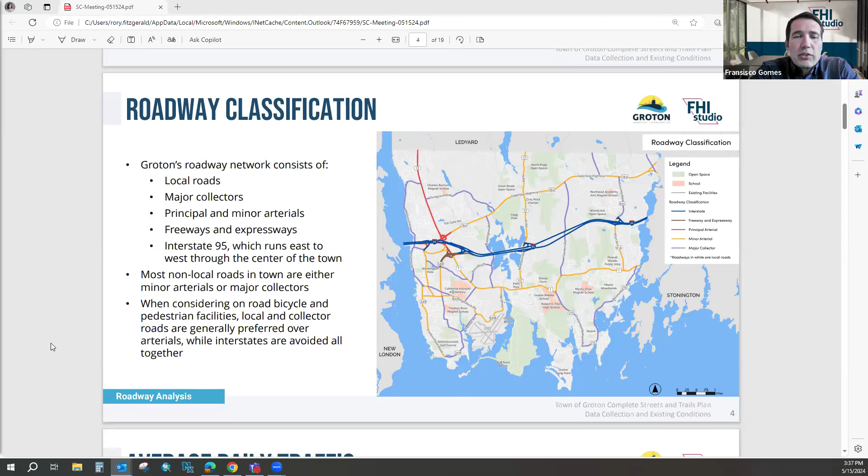But we also took a look at, if we go to the next slide, traffic that you have on those roadways. Traffic can be a huge factor in bicycle facility planning, and to a lesser extent in pedestrian facility planning. But it's very often one of the metrics we look at when we consider the feasibility or suitability of a corridor to accommodate bicycles, and potentially what type of facility would be required to comfortably and safely accommodate bicyclists. So what we see is that you have a range of traffic volumes in town.

Fortunately, while you do have some state roadways that carry relatively high traffic volumes, up above 15,000 vehicles per day, which is a lot of cars, you don't have very many very high volume roadways. Here the darker, red colors are very high volume, 20,000 or more vehicles a day. That's really just Route 12 where it meets I-95. In other areas, our volumes are more manageable from the perspective of considering the accommodation of bikes on those roads or adjacent to those roads.

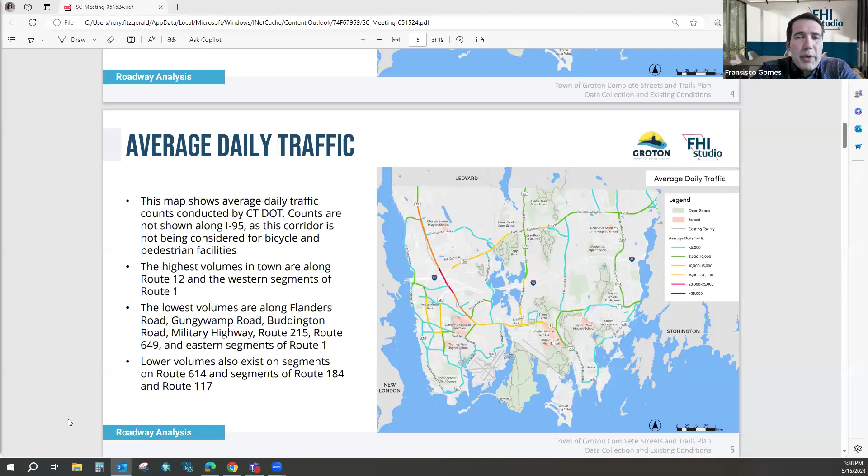So that's all good news, and we have that all mapped now. If we go to the next slide, we do have some traffic speed data, and speed is another important factor when planning bicycle facilities and both the safety and comfort of those facilities. What we see here is the speeds are on the higher end. So while the traffic volume is relatively moderate on many corridors, the speeds are on the higher end. Sometimes there's a direct correlation between the two: where you have a lower volume roadway, the speeds are higher because there's less traffic to constrict or restrict speeds.

So you have many roads that are above the 85th percentile speed. Real quick, a basic lesson on 85th percentile speed: that's the speed at which 85% of traffic is traveling at or below.

It's intended to eliminate any particular outliers of people speeding or scofflaws, and it's intended to paint the picture of the average or most typical traffic flow on a corridor. So your 85th percentile speeds are at or above 40 miles per hour on many corridors. As a cyclist sharing a road with traffic at that speed, it's not a very comfortable experience, and it reduces safety. So in addition to traffic volume and the characteristics of the roadway, we need to consider traffic speed when planning complete streets, bicycle and pedestrian facilities.

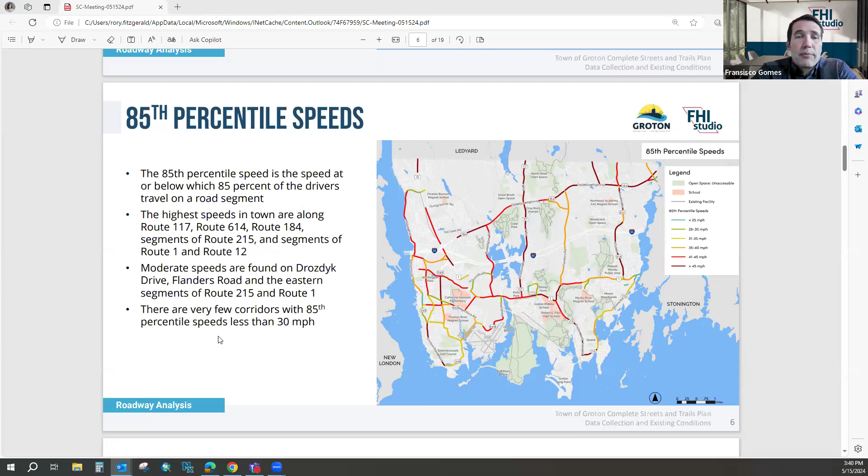Next slide. We took a look at the crash safety data. Of course, wherever you have traffic volume and intersections, you're going to have crashes. So what we see here is where the crashes are occurring. These, what we have on the map, are hot spots of all crashes. The heat map - red dots and yellow indicate higher frequency, green lower frequency crashes.

What we see here is, of course, I-95, but let's subtract that out of the mix because that's not part of our study area or scope. But your local roadways, your state highways, whether it's Route 1 or some of the other state roadways, that's where your crashes are occurring. They're crashing mostly at intersections. So it's a fairly predictable pattern.

At this stage in the planning, it doesn't discourage us from considering any of these corridors for bicycle facilities. In fact, in many cases, you can make an argument that where you have a corridor with a higher degree of crashes, it's really an argument for a separated bicycle facility or some sort of pathway to accommodate bike traffic. Particularly, it's an argument for getting pedestrians off the roadway, away from some of those traffic conflicts.

This is something we'll continue to look at, and we'll look at closer as we start to consider recommended facilities and various intersection treatments to accommodate those facilities. We'll be taking a much closer look at what types of crashes are occurring so that we can improve safety along with expanding mobility for all users.

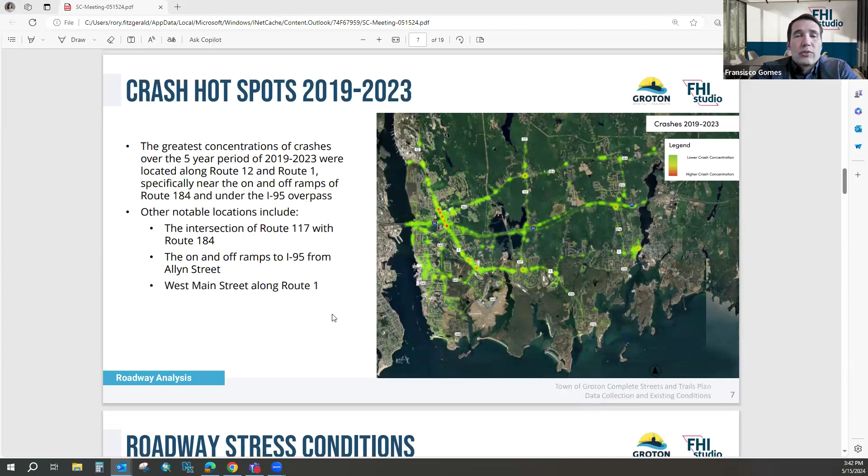If we go to the next map, it's a composite map that we made of those various conditions, whether it's traffic volume, speed, or crashes. So what we see here is when you combine those different factors, it adds to the level of stress on any particular corridor.

The more volume you have, the higher the speed, the greater the incidence of crashes, the higher stress environment that will be. At which point, if we want to accommodate pedestrians and bicyclists, we want to make sure that in addition to being safe, which is the number one priority, that they are also comfortable, because if they're not comfortable, they won't feel safe. And if they're not comfortable, they'll be less likely to bike or walk or use the facilities that are built for them. So comfort and level of stress is an important consideration, and this map just guides us in that effort.

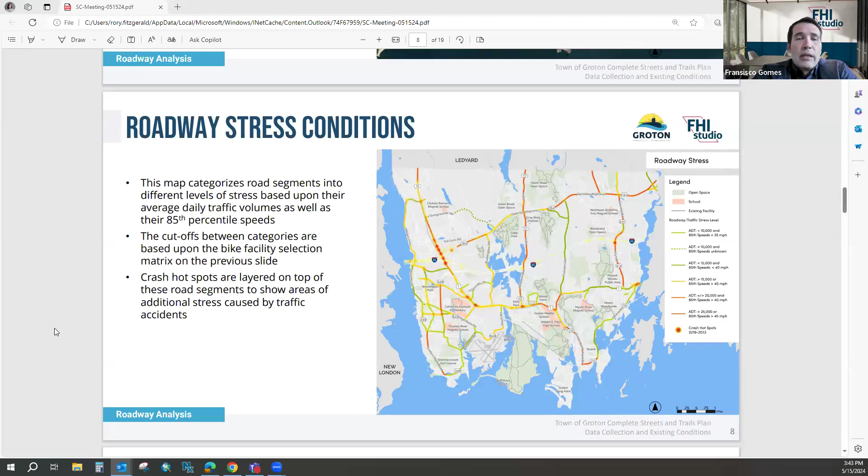Now if we go on to the next slide, this just expands upon that work with other factors. Here we actually map out the stress - the prior slide was the factors that contribute to the stress, this is mapping it out. So the green would be lower stress corridors, the red higher stress, et cetera.

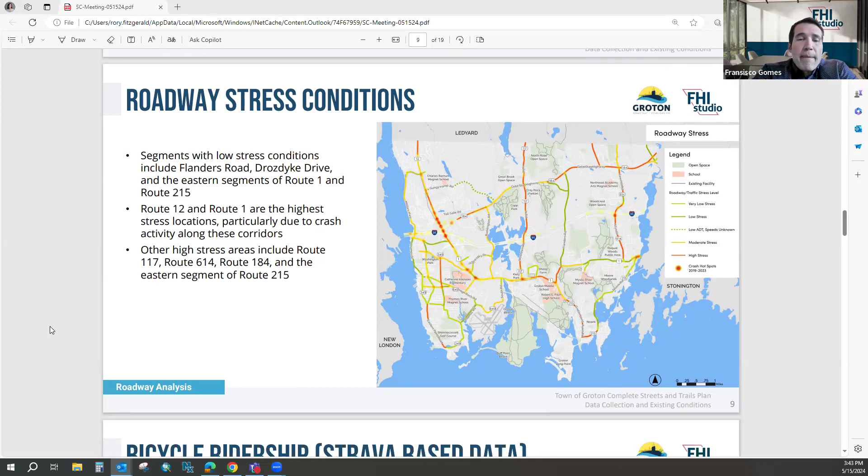On to the next slide, we've also taken a look at where people are riding bicycles - this is just for biking, we could pull one down for running as well. This is Strava-based data. Strava is an app that a lot of people have for their phones or watches, and it requires the user to basically log their trip, run, bike, or whatever it may be and record it. So it's driven by recreation - it's a recreation-based app for recording your workouts.

Fortunately, Strava has that one side of their business consumer focused with the app. The other side of it is actually selling the data, which I think, as we understand, most of these tech companies make a living by selling our data. We have a subscription to that data, so we pulled down the Strava bicycle data for Groton.

And we have some maps that show exactly where people are recreationally riding their bikes and logging those trips. The heavier, the darker the line weight, the more trips there are. We can zoom in to get more detail. We have a good idea of where people are recreationally riding, and it's on many major roads, even ones you'd expect people wouldn't want to bicycle on. They're riding long trips, or even short trips in some cases.

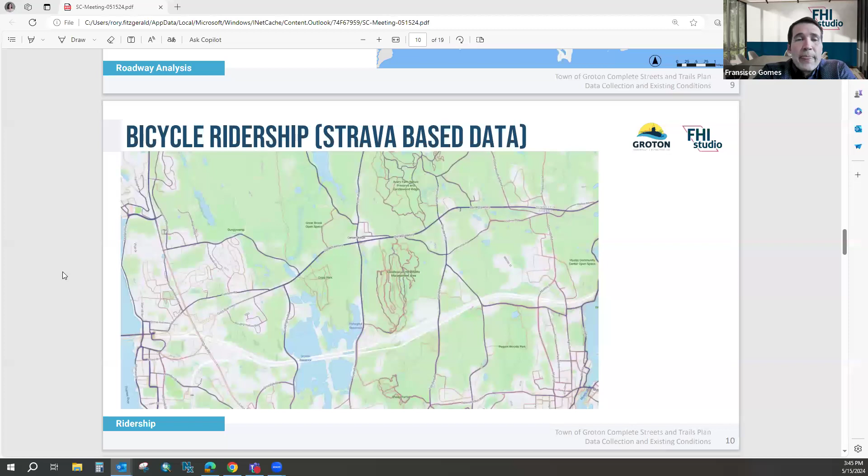So this is a piece of information that will help us quite a bit in our work. We did reach out to SCCOG. So that's the northern half of Groton, and here's the southern. Hey Fransisco, this is Brian, I have a question about the Strava data.

Yeah, absolutely. There is an option for a Strava user to characterize their ride as a commute. Do you have access to that level of data? Not on the surface — I'm not the one who pulls this data down, and I think that may require a really premium level of subscription. I think we just have the entry level subscription, so I'm happy to look into whether we can get some metadata for these trips. Right now, we definitely know where the routes are and what volume of traffic there is on those routes. As to whether we can get metadata on that, I'd have to look into it.

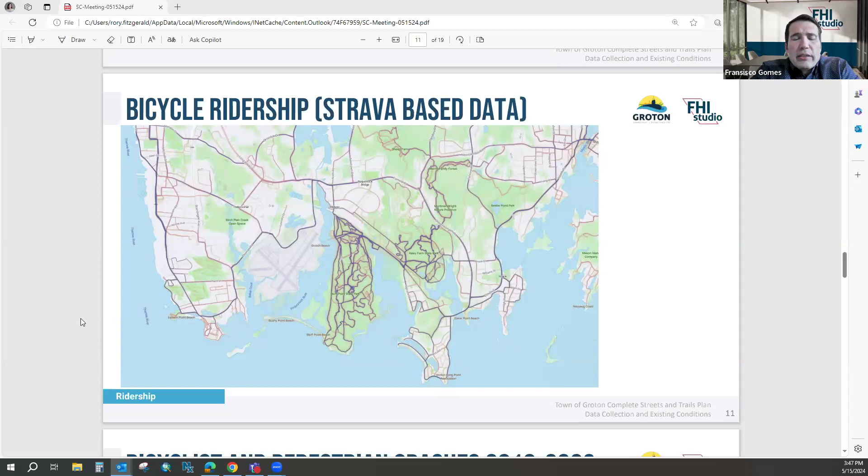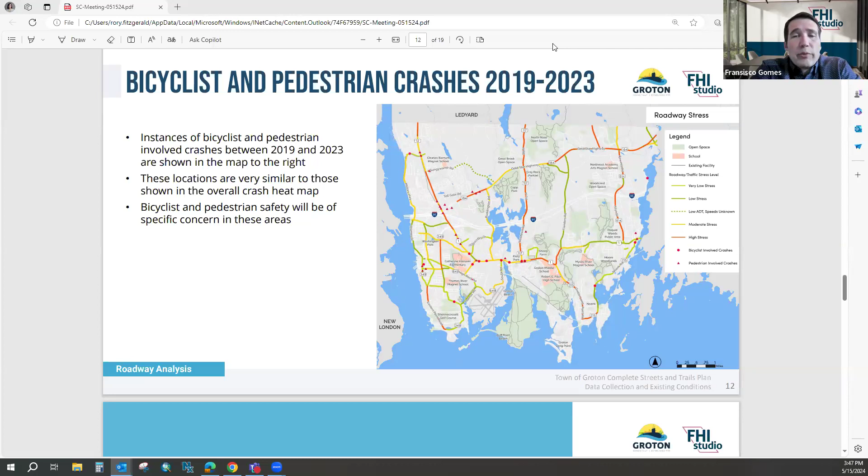All right, so I talked earlier about traffic safety and crashes. If we go to the next slide — fortunately this is an excellent data set we get from the Connecticut Crash Data Repository, which has a tremendous amount of metadata. You can really understand what's going on with the crashes, what the contributing factors are, whether it was bike-ped related, time of day — it's an incredible resource of information. So we pulled the bicycle and pedestrian crashes over a 5-year period, as recent as the end of 2023.

So we have a bunch of pinpoint locations. We see a consistent amount of crash activity primarily along Route 1, and some other locations scattered, but there's almost a pattern, which can be difficult to establish sometimes with bike and pedestrian crashes. Fortunately there aren't many of them, and they tend to be one-off occurrences. We don't often see patterns, but here there's definitely a pattern along Route 1 in those triangles and circles shown — circles are bikes and triangles are pedestrian-related crashes. So we'll want to take a much closer look at that as we consider facilities for Route 1.

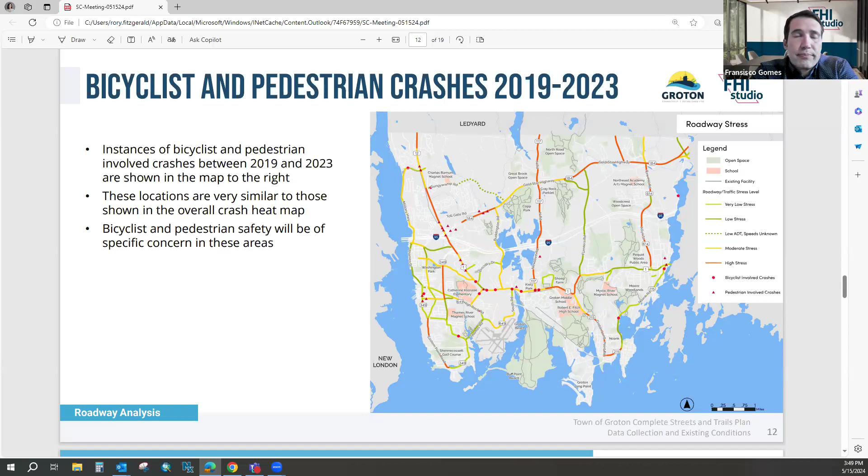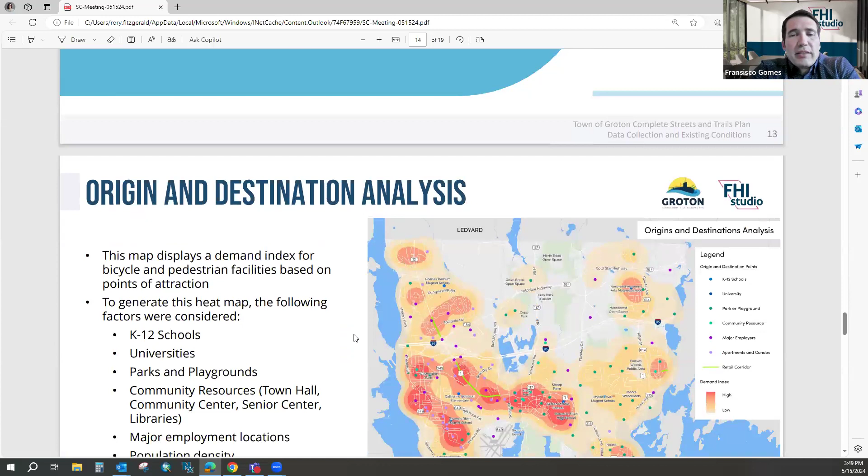Okay, all right. We've also done an origins and destinations analysis. This analysis is intended to show us where we expect most trips to be originating from or arriving at — both bicycle and pedestrian trips. This is analysis we conduct ourselves, a GIS tabletop analysis. We first map locations we'd expect to generate those trips or be a destination for people arriving on bike or foot — starting with K through 12 schools, universities, parks and playgrounds, community centers like libraries, town halls, senior centers, major employment locations, areas of high population density, and retail corridors.

So we map all of that. We assign a weight to each one of those pinpoints on the map, and then they exert an influence, and there's an algorithm or a script we run this through in GIS, and it produces a heat map.

So what we see is that we expect most of that activity to be generated, those trips to arrive at or be generated from locations along Route 1, mostly south of I-95, on the western corner of town, to a lesser extent on the Mystic side of town, and much lower densities of trips generated north of I-95.

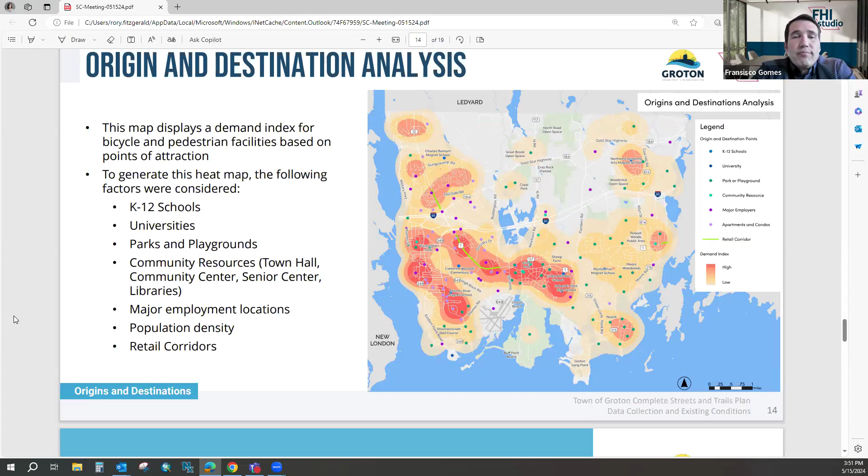Fransisco, we've got a question. Yes, sir. Patrice has a question for you. Hi, it's Granatowski. A question about the map that's in front of us right now.

Is this based on historical data or is this speculative? I would call it speculative. So these aren't actual trips. This is modeling that we've done, and it's pinpointing all of these locations that we expect would generate a bike or pedestrian trip, or be more likely to. And then we model what we expect would be the highest density of trips.

So it's a model, and it's somewhat predictive, except this is true right now in this moment. We're not painting the picture of a future scenario. These are the locations where we think you have the highest activity of bike and pedestrian trips or demand. It's not always associated with actual activity because there may not be any facilities to support bicycle and pedestrian trips in these areas. But we think this is the area of highest demand, and that could be a latent demand if there are no facilities there right now.

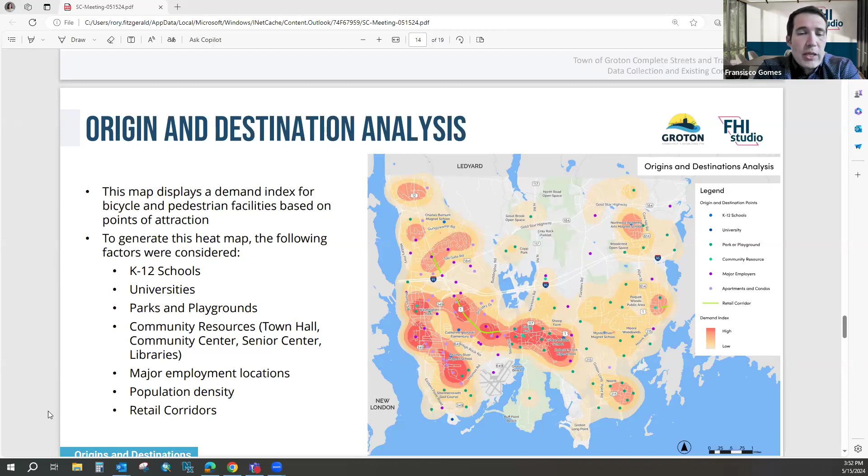Okay. All right, so our next slide.

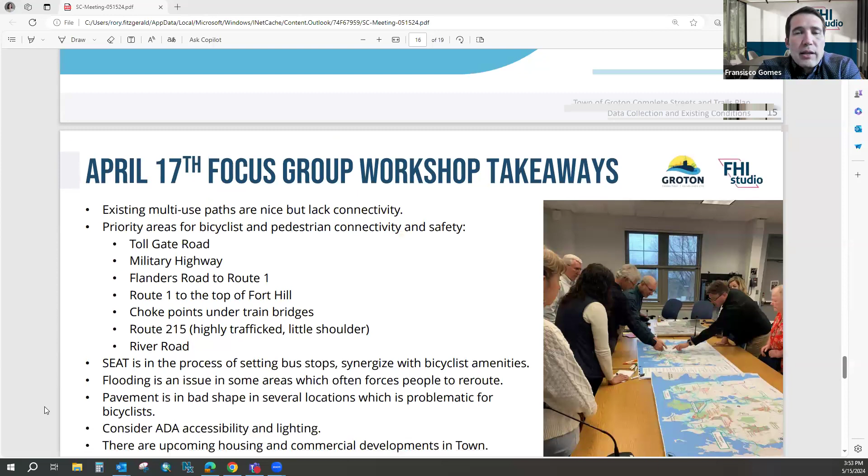I think most of you, if not many of you, were in attendance at our focus group workshop last month, so I won't spend too much time on this, other than the fact that there were some clear takeaways from that. We've got a summary report that goes into much more detail here.

Some of the key takeaways: we definitely identified key corridors that should be a priority for bicycle and pedestrian connectivity. We understand that doing a better job connecting to and integrating with transit service is really important, and that there are some routes that due to flooding often force people to reroute. So we need to think about flood hazard areas as we plan facilities, and have some redundancies likely built in to accommodate flooding, whether storm related or seasonal.

We know that pavement quality is an issue, and it's an issue in every community we work in. Particularly for bicyclists, the edge of the roadway sometimes can be the biggest challenge. ADA accessibility is incredibly important, and lighting is also an important issue for pedestrians.

There's upcoming housing and commercial development that should be accommodated or connected to facilities. And then there's some active work on facilities such as the Poquonnock River Boardwalk, and we need to make sure that we're connecting to those projects.

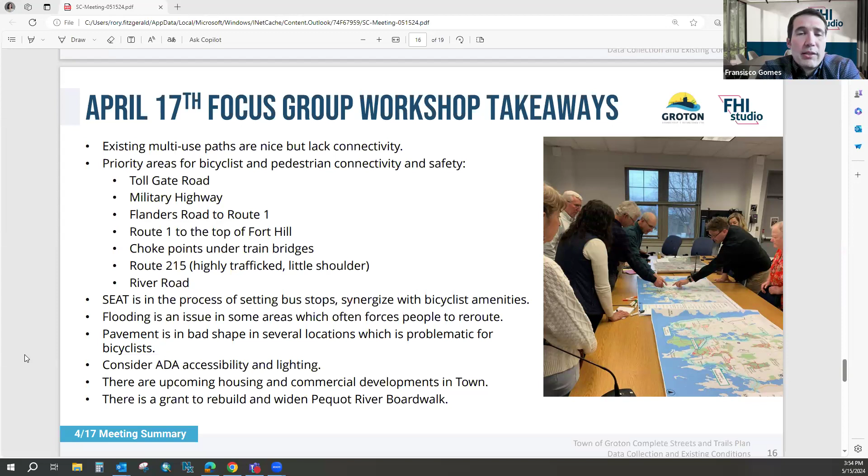Okay, Francisco, there's a typo. Yes. Your last bullet item, yep, that is actually the Poquonnock River. Oh, I'm sorry, you'll have to look that one up for spelling. I'm not going to try and spell it. Yeah, no, I got it. We've got a Pequonnock in Windsor, although I think it's spelled differently. Okay, thank you, Brian. All right, next slide.

And then, of course, we did a tabletop mapping exercise. Based upon the work we did with you last month, our existing conditions work from the various multiple plans that have recommended greenway corridors or bike routes, we definitely have a network that we would consider to be a preferred network. So we have a good starting point, the framework of a bike and pedestrian network.

I think our next step is to take a look at this, lay it on top of all the data we collected, and then start to identify corridors that we think have real potential to accommodate facilities, and then figure out what type of facilities those should be.

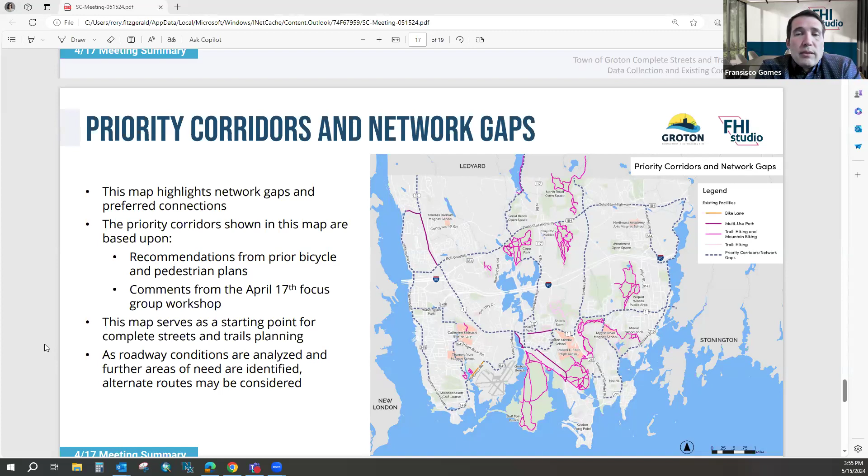As I mentioned, we have an online survey up, and we really need some help getting the word out on this. I know Mark's been pushing this out as best he can, and the rest of the department's been pushing it out on social media, on the website, on message boards. But to date, we've had a little more than 100 responses. We do have this out in a Spanish language survey as well, but we have not yet had participation in it. We have flyers for the Spanish language survey too, so we really need to get people to participate.

We don't have a hard deadline on this. We can keep it open for a while, but as we get into the middle of summer, we start to lose people's attention. So we've got another month or so where I think we could really get people's attention. If we can do whatever's necessary to get the word out and get some real participation, the feedback we receive from the surveys is just another touch point that will help guide us in decision-making and in our planning, so it's really valuable. The binary answers to questions, the yes or no, or checkboxes, are valuable, but the open-ended responses can be really telling. The more people we can hear from, the better.

Great. Thanks, Kalle.

Thank you. My name's Tom Hogan. I'm a senior engineer with Wright Pierce, and I have with me Kalle Maggio, a landscape architect, and Larry Rusiecki, project manager with the firm.

We began talking about some of the project status, but we'll go over it again. Greg mentioned the project area, and I handed out some of the concepts we're going to go through in more detail so we can see. I realize it's hard to see at that small scale. There's a lot going on, but we'll talk about some design considerations, the concept drawings, some options, utilities, and then hopefully have an interactive discussion about what we're showing. And this is us.

If we remember, we engaged with Greg's department at the end of last summer, early fall, then went directly in November or so to a public listening session held at the fire department. We had great discussions about some of the observations over time from people who live, use, or visit the project area. We took a lot of that information and made a record of it.

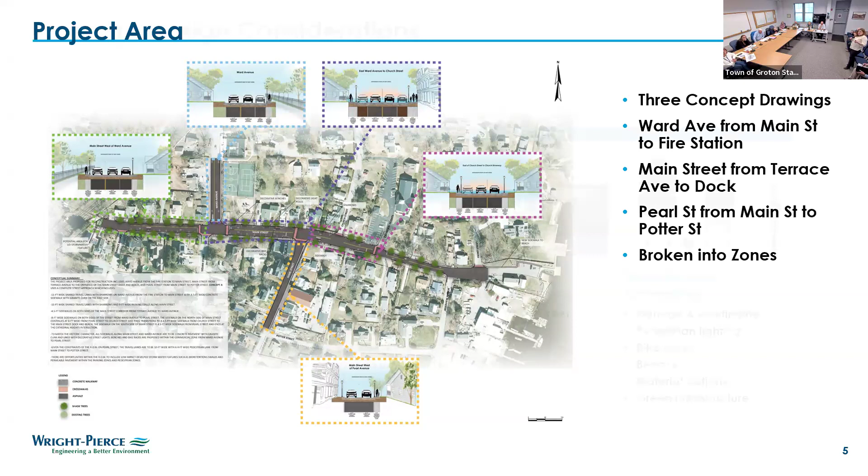It's kind of a working document at this point. We're definitely looking for input, thoughts and ideas. Essentially what we tried to do is look at different ways to improve the intersection by adding additional lighting. We noticed that during the evenings it was relatively dark in the area, especially during the listening session, around 4:30 or 5 o'clock, and it was pretty dark in and around those corridors, hard to navigate especially during winter evenings, and I'd assume even during the summer. We also looked at pedestrian and cyclist connectivity. As of right now, there's very limited pedestrian zones or cyclist zones.

So some of the things that we looked at is trying to incorporate the community feedback. One of the major concerns that the community had was to not make it look anything more than, so to kind of compromise with the complete street strategies and what Noank and the main street there has continued to look like over the history of the road. So that's something we took into consideration.

We also looked into the parking. We noticed that there were a lot of people parking in areas that said no parking. So to consider defining areas where people are able to park with clear signage and pavement markings, and to also add in those sort of off-street signage for parking as well.

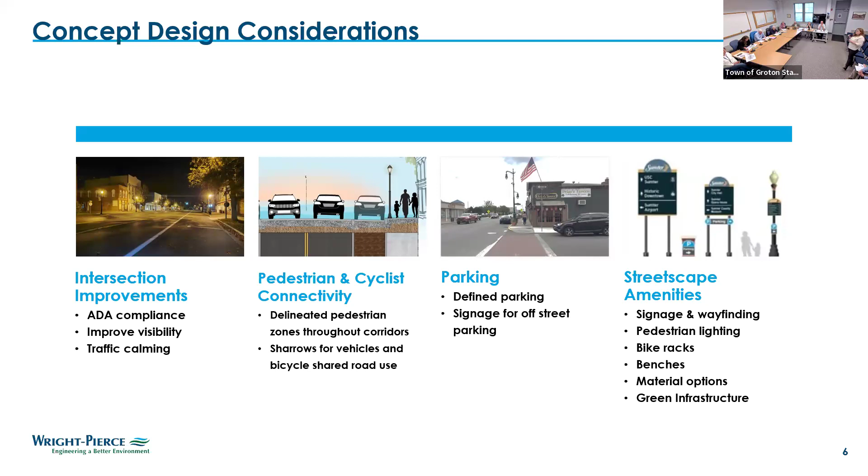So concept A, the main differences between the concepts, it's very hard to see. I know it's at 60 scale when it's at a 24 by 36. So at 11 by 17, it's about 120 scale. So what we tried to do is break them up into section elevations. Again, fully customizable - we can address and edit these as needed to move forward into the public comment phase.

If you guys have any ideas or thoughts or things to add or take away for whatever reason, just let us know. But basically what we ended up doing, we broke these up into zones as mentioned before. So that first zone that you see was that green zone over by Ward, west of Ward Avenue, where we considered that a residential zone, basically Main Street west of Ward Ave.

And we've included 4.5 foot wide curb sidewalks on either side of the street, maintaining 11-foot travel lanes, not just there, but throughout the Main Street corridor, and also Ward Ave as it exists today, even though it's not delineated. Another element that we included was 9-foot wide parking stalls, painted out in the conceptual drawings, but there's different ways to sort of conquer that, whether it be with pavement markings or even considering permeable pavement shoulders to help with stormwater infiltration.

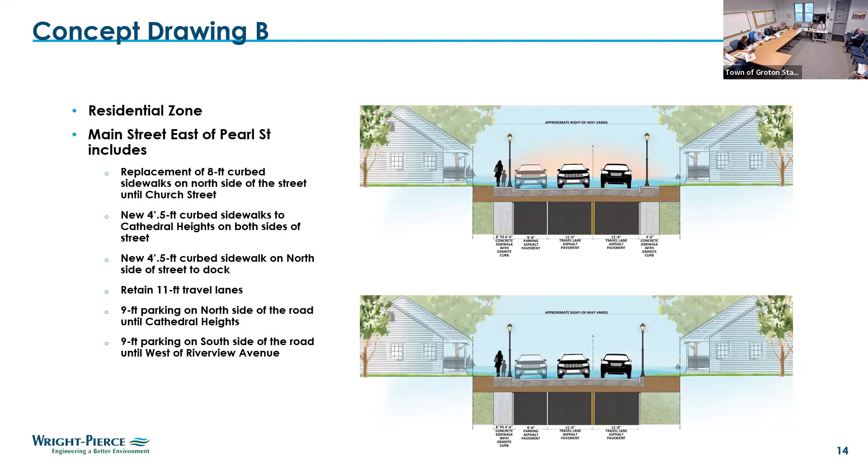Instead of needing to realign the roadway, we decided to instead allow the parking that people are currently doing on the south side, east of Cathedral Heights to west of Riverview. About 3 stalls can be retained there.

Concept C, the thought process here is to have a continuous walkway all the way from the west side of Main Street down to the docks. This does require a roadway realignment. It does encroach into people's lawns a little bit more, and there's going to be some retaining walls required. It's a little bit more of an invasive process, but since it's a full road reconstruction, this would be the time to do it and really look into how exactly this corridor will look as a complete street.

With those bicycle corridors, it seems to us that it still lies within the town right of way. Correct, everything is within the town right of way. It's just that within the town right of way, there's significant changes in topography, some retaining walls with some driveway aprons, so that required us to encroach within the roadway to meet these design criteria.

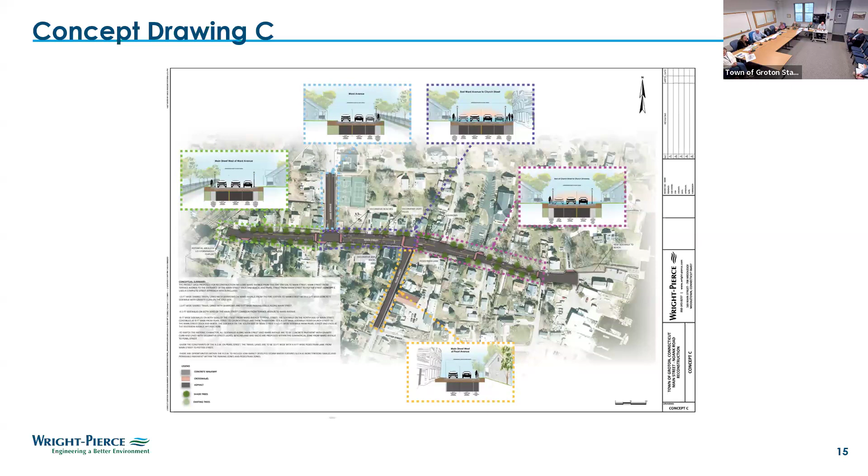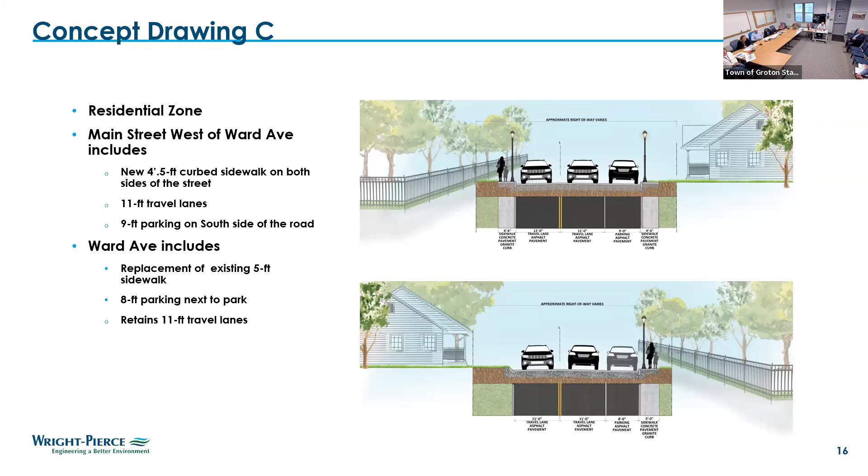Which is where you see us utilize the 4.5-foot wide curb sidewalks for most of the design, rather than the 5-foot. That said, we do know that there is a transition period that would need to take place for ADA compliance, where you would go from 4.5 and widen it to a 5x5 every 200 feet or so. We can accommodate within certain areas and try to mitigate the amount of impact it will have on the overall topography and reduce the amount of retaining walls that would be needed.

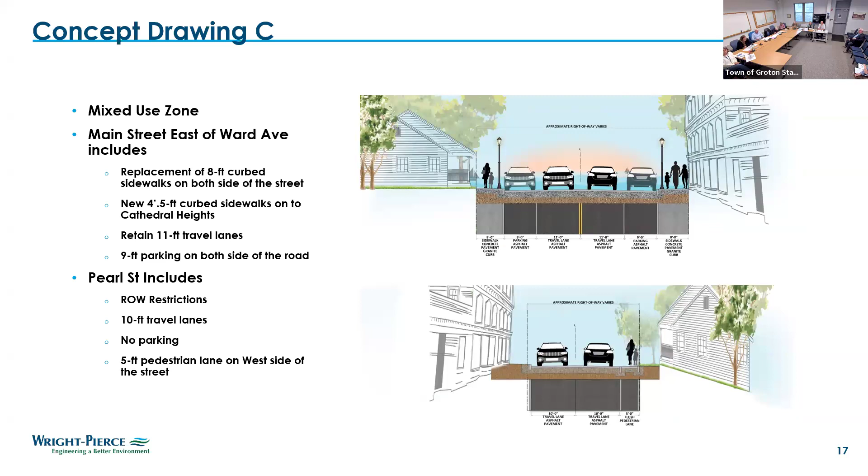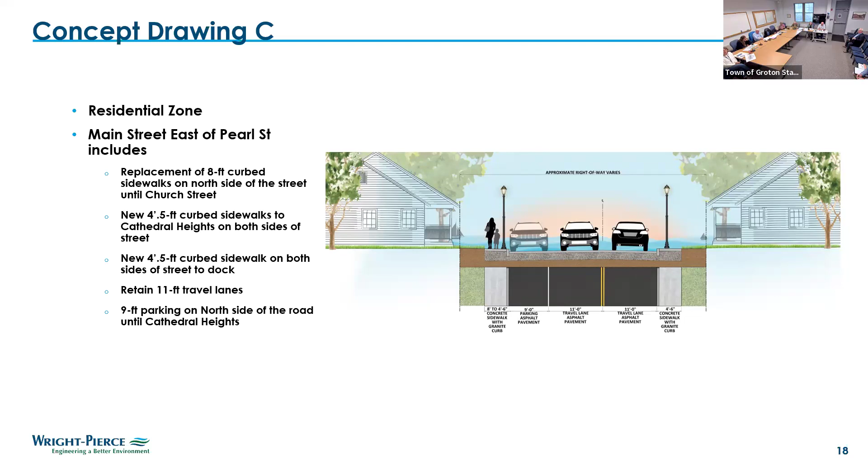So again, very similar to the other concepts. I believe concept B has a very similar layout here for these corridors within the mixed use zone. The difference is that instead of having parking on the south side, we encroached into the roadway to include a sidewalk on that south side, but still kept that continued sidewalk on the north side straight through Main Street.

Streetscape amenities to consider - we would like the town and neighborhood village input on what they would like to see within this corridor, whether they want sidewalk curb decals to add character, or to create different zones and materials that feel more quaint and inviting, thinking about the atmosphere and scale. That's really where those material options come into play. All of the materials we would consider are fully ADA and PROWAG compliant, as long as the design and construction meets those criteria.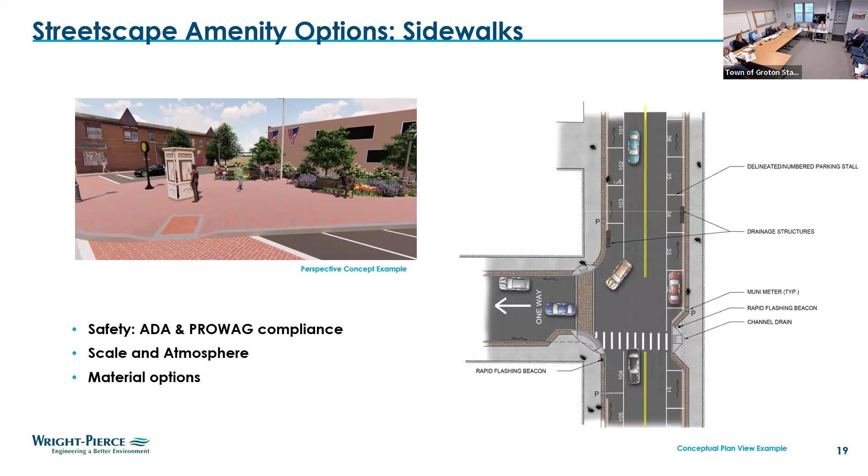Intersections and crosswalks - you'll see we used a bit of a salmon color, but we're not married to that idea, it's just for graphical purposes. So consider the different types of crosswalk materials, whether they want inlays, pavers, traditional paint, or community projects to express the neighborhood's artistic views, if that's something they desire.

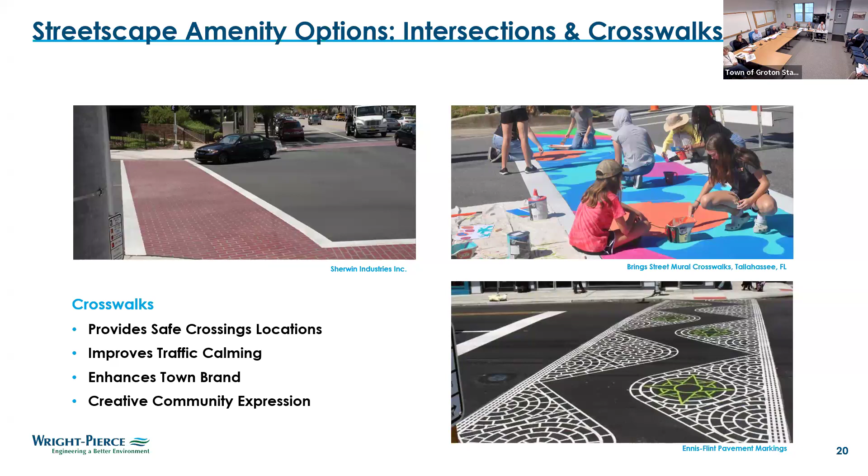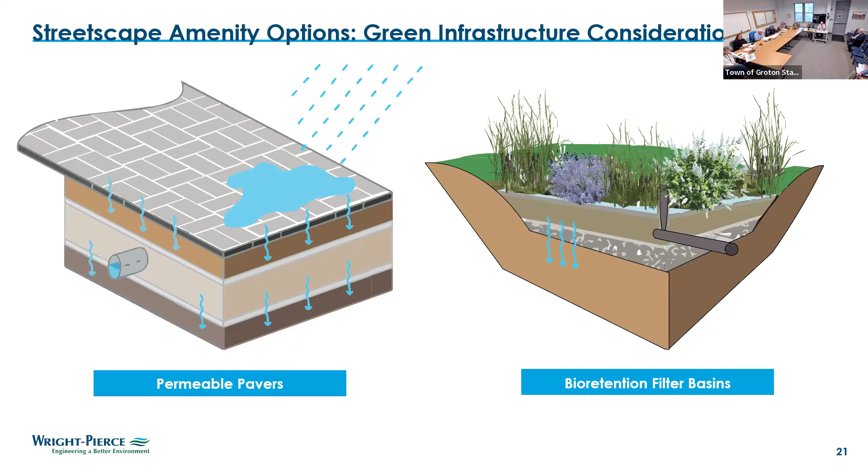Other elements to consider - in a lot of cases we're widening the roadway in some areas, and that's going to impact the overall impervious surface area. That said, we need to look at stormwater and how that's going to be impacted. So we want to consider green infrastructure practices such as permeable pavers, thinking about utilizing those in the parking stalls, and also bioretention filters, specifically at the west end of Main Street, west of Ward Ave. There is an opportunity to utilize that space as a bioretention area for stormwater infiltration.

Again, things we want the neighborhood to consider is coming up with their own sort of brand, and something to think about is how they go about it. One way is to include signage and wayfinding within the corridor. One issue they have, as you can obviously see, is people park in areas they're not supposed to park. So clearly defined spaces for parking would help them understand where parking is available behind the shops and different commercial areas.

Other options to consider - there was support for benches and bike racks within the corridor. And as I mentioned, they were looking to include the trees that were originally removed. I believe it was Dutch elm disease that wiped out the trees lining the roadway on Main Street, and bringing back something that could recreate that historical look is what the community was looking for.

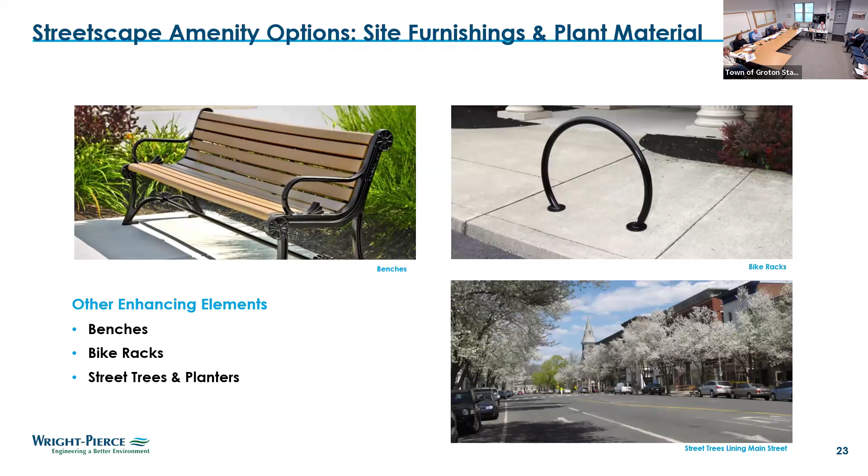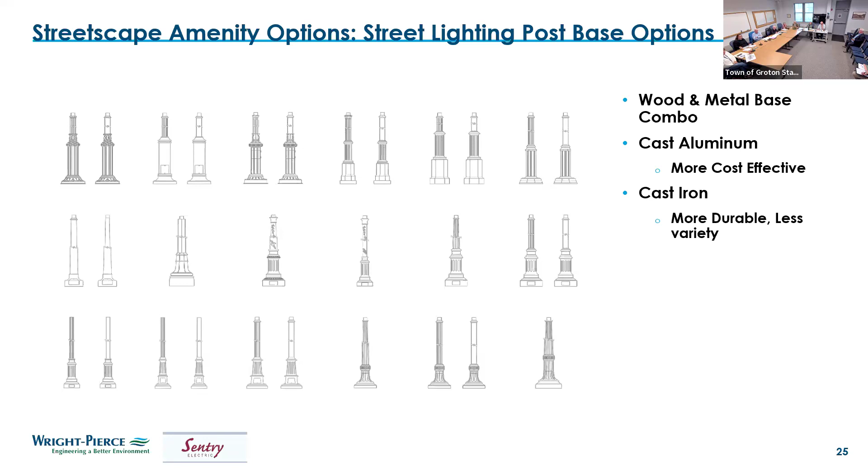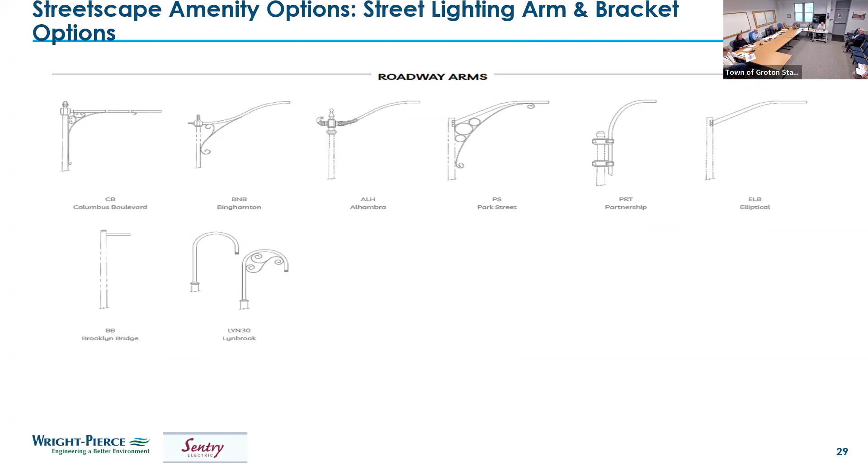There was very high support for street lighting, albeit there are some options - I won't go into full details, but there are a lot of options available, and that can really help the neighborhood create a sense of identity. That said, picking out their pole base and standardizing it, or if the town would like to utilize their own and use that throughout the corridor, that's also an option. There are many different types of light fixtures available within the catalogs, or if the town has their own to utilize within the corridor, that's something that can be discussed during community input. The type of arm is essentially where you mount the light fixtures.

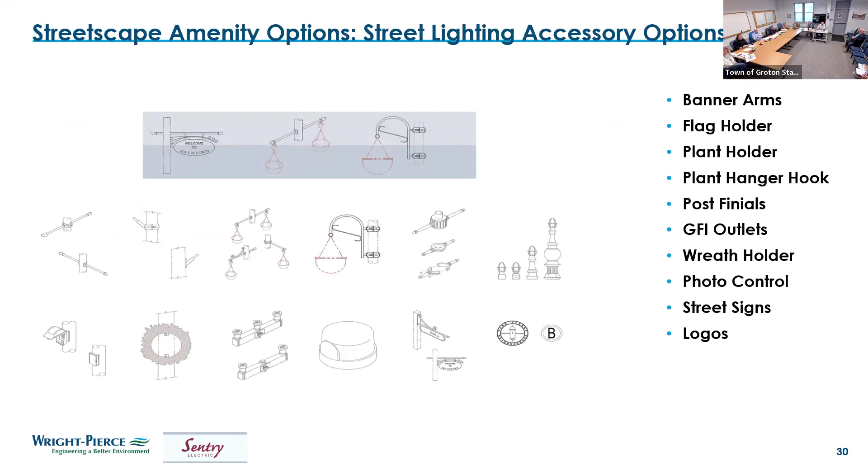The different accessories, whether for flagpoles, baskets, or wreaths, for celebrations and things of that nature. And the last thing we wanted them to consider, with significant feedback on this, was taking the above ground utilities and trying to bring them underground to bring back that historic view shed that ran throughout the Main Street area. It's something we've looked into, but I don't want to speak to it too much because I only understand it at the surface level, so I'll give it to Tom or Larry to discuss.

We recognize the comment and we'll continue to discuss it. That's kind of where we are with it. There are a lot of complications with it. I like the idea, but Greg and I are going to continue to investigate that.

The only other item, and thank you Callie, it was a great presentation. You talked quickly about stormwater and green infrastructure, LID. We talked about biofiltration. We don't have an official mechanism or BMP cited right now. The idea is to have this on generally a small scale so that we can find the appropriate location if it exists, and take advantage of that for responsible stormwater management.

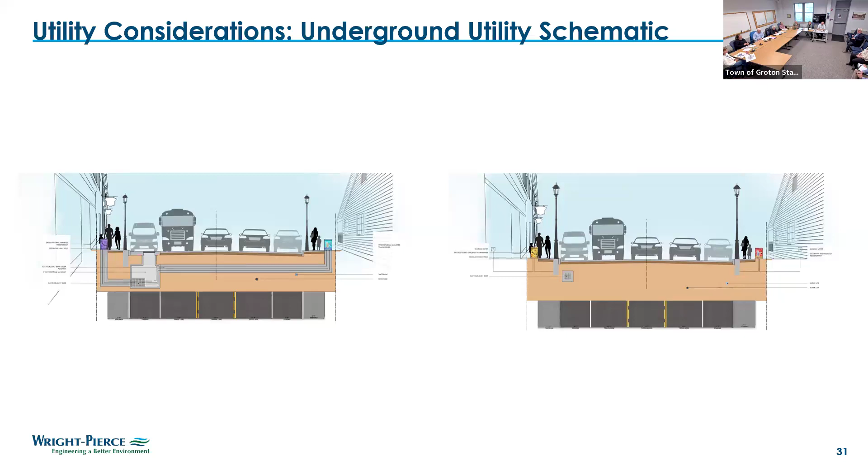I don't know if there's anything else on utilities, we're kind of at the surface. The other utility considerations at this point in time, we'll continue to discuss, but we've really been focusing on what we heard from the public listening session, what we've learned from our subsurface investigations, our survey, and our review of existing conditions. We have these concepts that I'm glad for this opportunity to talk to you about.

Even in this short amount of time, we've gained some valuable feedback. I know Greg is working on scheduling a next session with Noank, or a public hearing, to discuss the concepts a little further after this feedback. So I don't know if there's any questions and or comments.

I think we have questions and feedback, but what I want to do is put that on hold for a few minutes because Greg has to leave at 5, and we want to hear about the current and ongoing town projects that we have on the list.

Greg, I just have a question to start it off. Did the town submit an application for a road safety audit on Route 1? Not yet, it has to go through the traffic authority. Okay, and they meet in June, so I'll have everything prepared for them for that meeting. Okay, great, thank you.